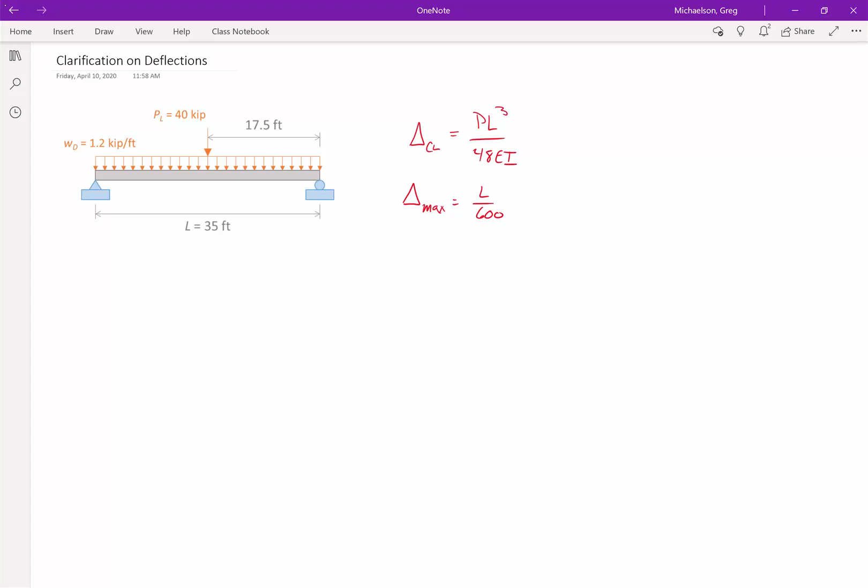What I think would make the problem a lot clearer for you to do for your homework and whatnot is to compute the limit, the maximum deflection first. So the maximum deflection is L over 600, which is 35 feet over 600, and then convert that to inches using the conversion factor of 12 inches per foot. I think I lost my parenthesis there. And so 35 times 12 over 600 is 0.7 inches. And so now what we can do is say 0.7 is equal to PL cubed over 48 EI.

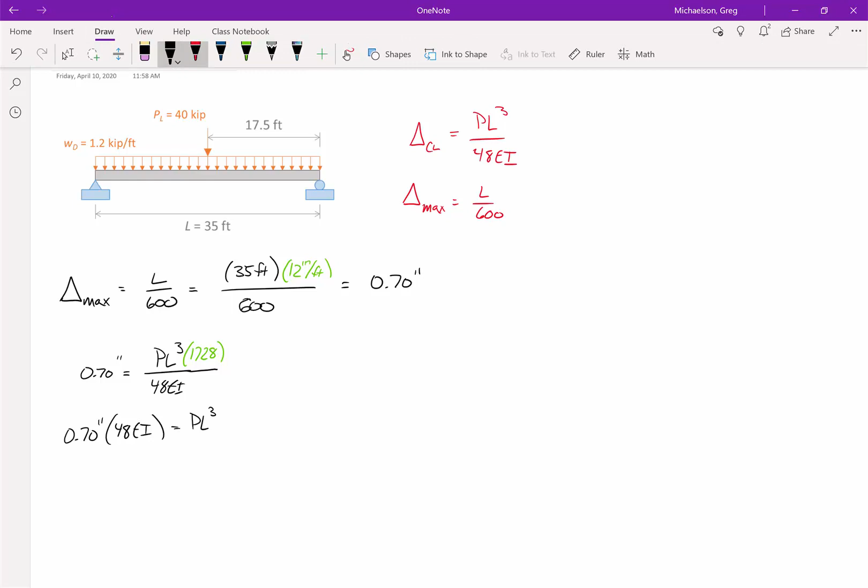And now we can use our 1728, because the 1728 is intended to yield an answer that's in inches. So by converting our deflection limit to inches, it makes everything a lot more straightforward. And so now we can just multiply both sides by 48 EI. So 0.7 times 48 EI is PL cubed times our conversion factor of 1728. And then all we have to do is divide both sides by 0.7 and 48E. And if you notice, everything on the left is going to cancel, except for the I, which is what we're interested in.

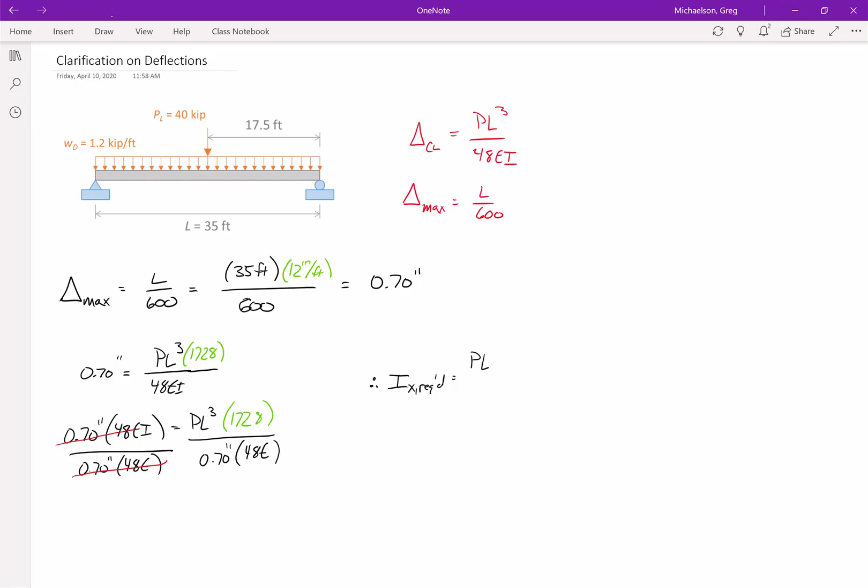So therefore, our IX required is PL cubed over 0.7 inches times 48E. And then don't forget your conversion factor of 1728. So that equals P, which is 40 kips, L, which is 35 feet cubed, and then we can use the conversion factor like we've been using of 1728. And then on the bottom, 0.70 inches times 48 times 29,000 KSI.

And so IX required, if you chug that out, so 40 times 35 to the third times 1728 divided by 0.7 times 48 times 29,000 equals 3041.38. Again, a lot more straightforward than having to derive a new conversion factor and a lot less clunky.

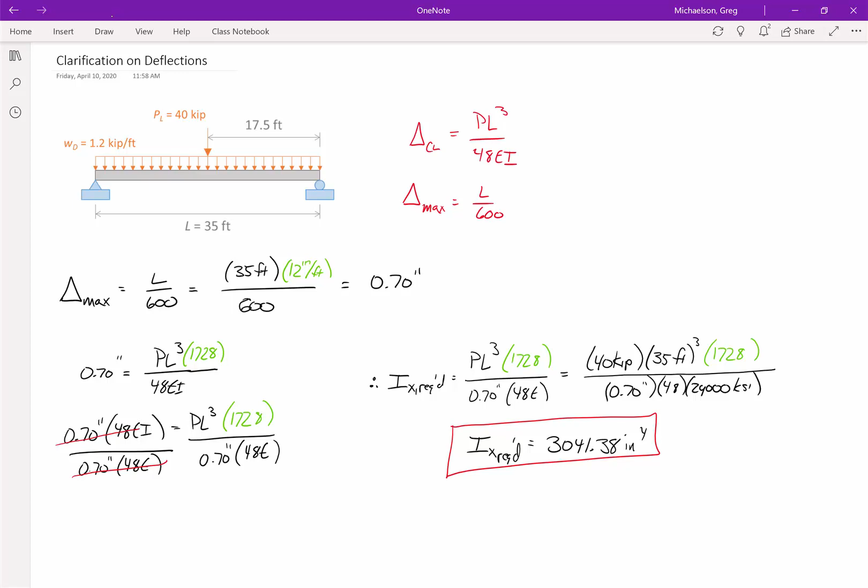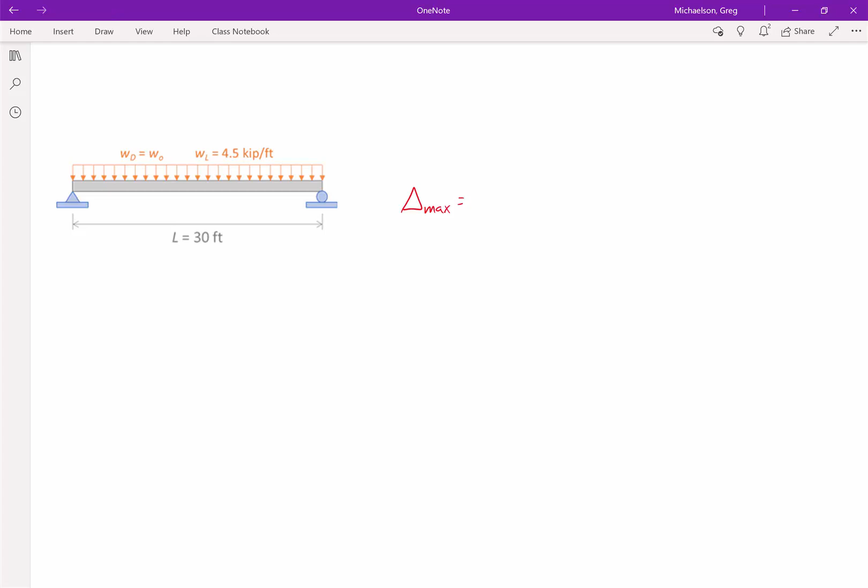So to make it a little easier for you, we can go ahead and look at the homework problem as well. So the homework problem has a maximum deflection limit. I believe it's L over 240. Let me make sure of that. Yes, L over 240. And we want to compare that against the center line deflection or the maximum deflection on the beam. Now, we don't use PL cubed over 48 EI because we now have a simply supported beam with a uniformly distributed load. So that's 5WL to the fourth over 384 EI. And so we use the same process.

We take delta max, which is L over 240, which is 30 feet over 240. And then again, converting that to inches. So 30 times 12 divided by 240 is 1.5. And then we say that 1.5 inches must equal 5WL to the fourth over 384 EI. And then we do the same approach that we did in the last one. So 1.5, multiply both sides by 384. And then divide both sides by everything but I.

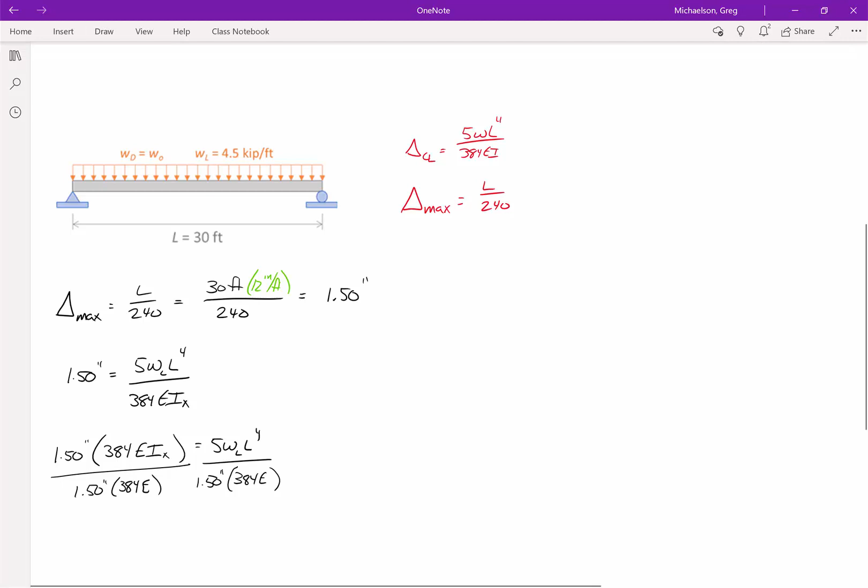So therefore, this whole time, don't forget, you've got to have your conversion factor. So yeah, it's a lot more straightforward to just convert your limit to inches, and then you can use the 1728 like you've done in the past. So 5 times 4.5 kips per foot times 30 feet to the fourth times 1728. I'll put that in green so that it matches what I've done before.

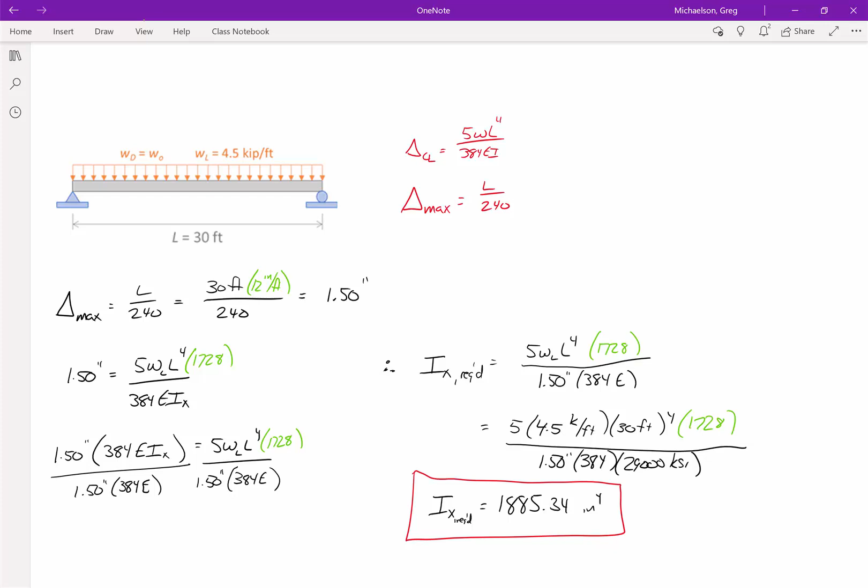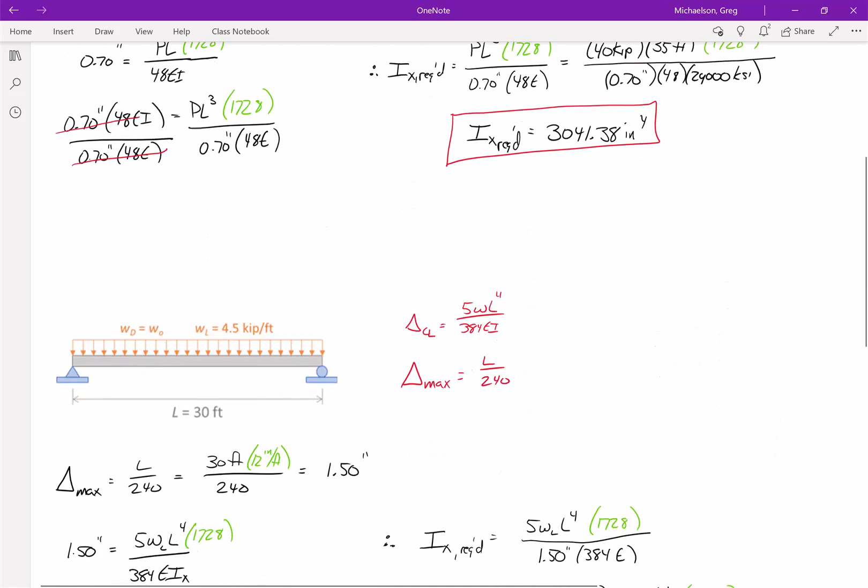And so let's chug that out. And that's IX required, 1885. All right, so again, hopefully that's a lot more clear than last time. It's the same approach. Before, just convert your maximum limit to inches and then plug and chug. Same thing here, convert your limit to inches, then plug and chug. And by doing that, you can use the 1728 like you've used before.